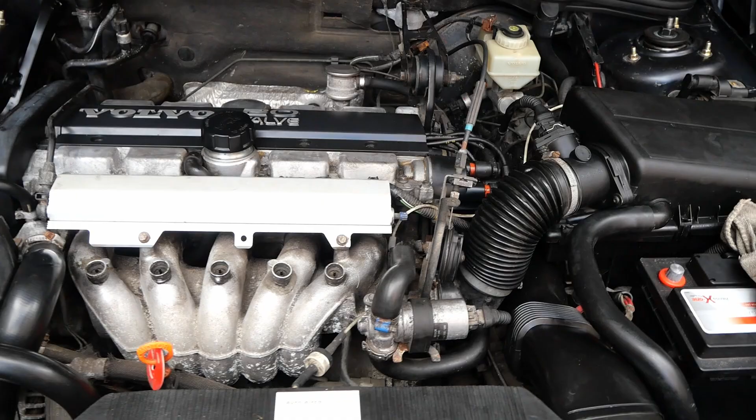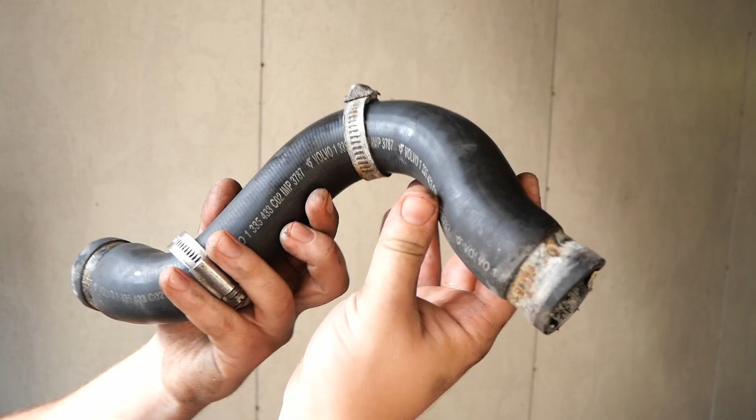Today we'll be preparing the engine to finally replace our old timing belt, as that is over 9 years old. Seeing as there are quite a few parts which need to be replaced anyway, we decided to remove the coolant reservoir because it's in a pretty bad shape, the steering pump as that makes an awful noise, the alternator because it's pretty much dead, and the serpentine belt, some coolant hoses and the thermostat. Now let's dig right... oh wait, we found yet another little surprise, so stick around and find out.

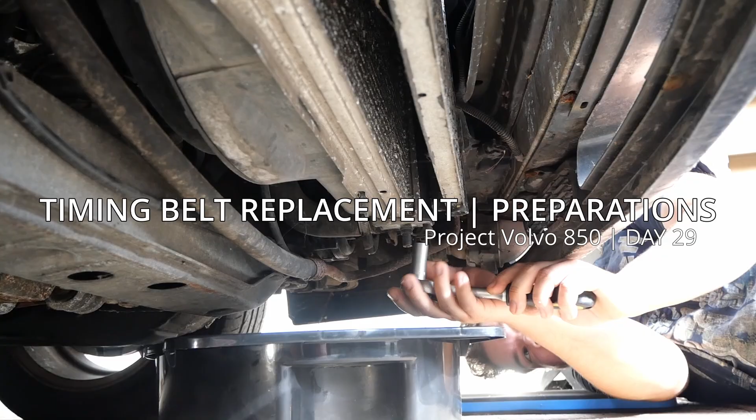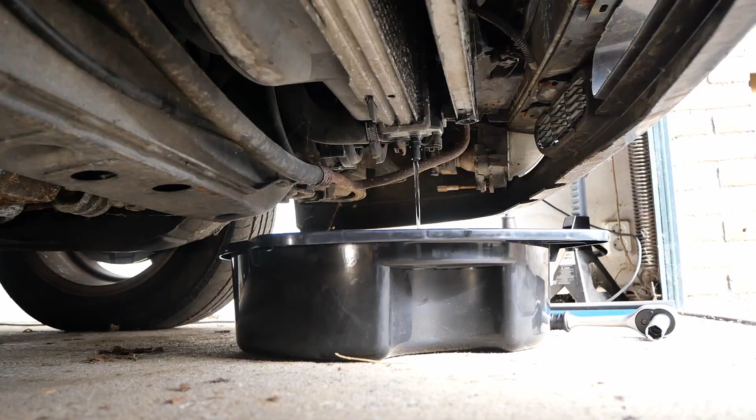Oh, it's loose. Alright, first things first, we need to drain the coolant system before we can remove the reservoir and some of the hoses. Looks like water. Well, if it has been water for 7, 9 years by now, then that flush will probably be a good idea. Now with the coolant drained, let's remove the reservoir and some of the hoses.

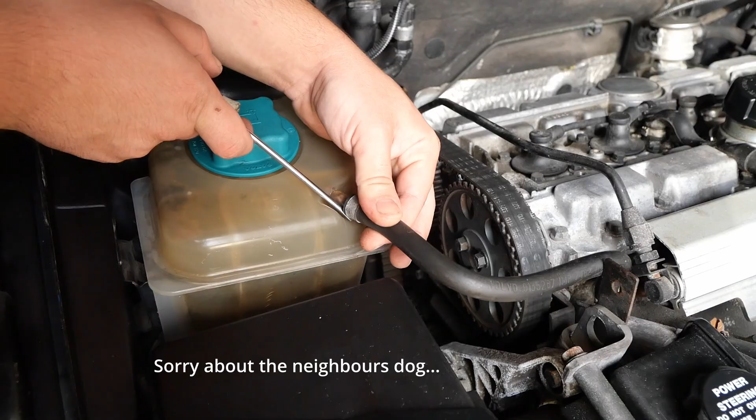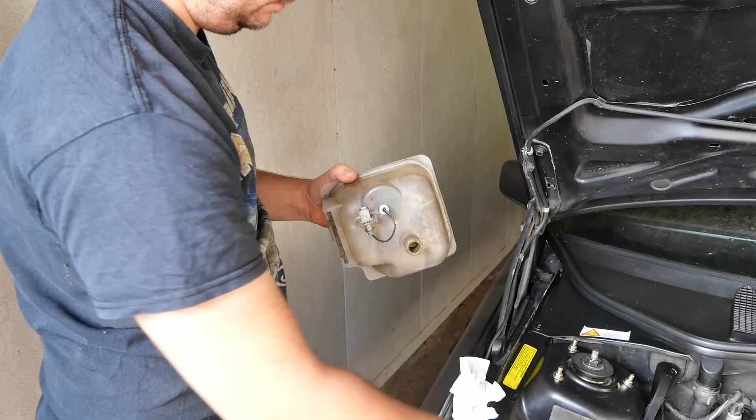Yeah, that's something we're gonna have to replace. Good way to start the day, right? Well, if we're gonna replace that, we might as well replace the coolant level sensor. Okay, that's out.

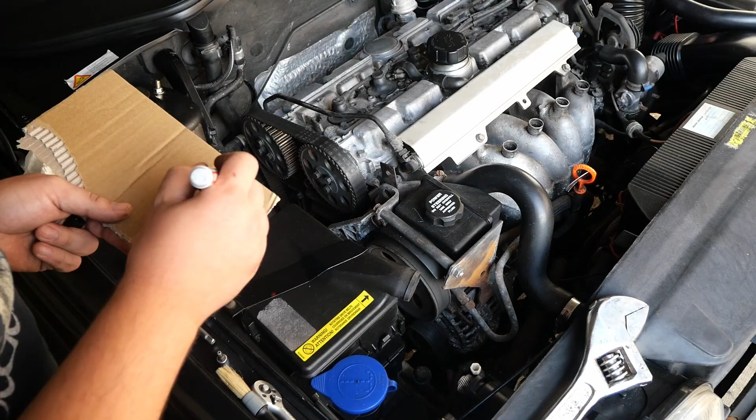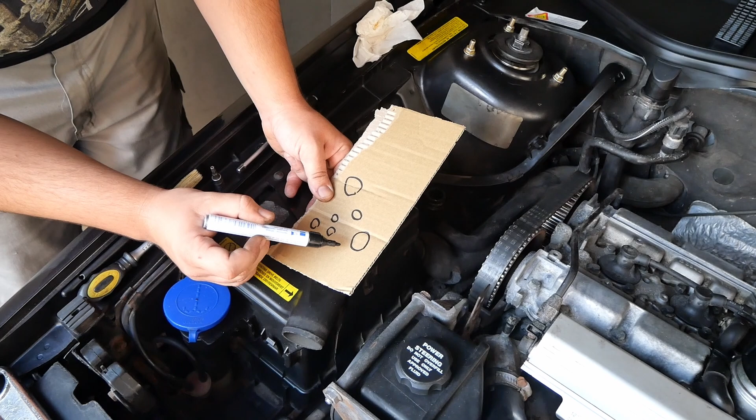Next up, we decided to remove the serpentine belt. Make a drawing: steering pump, tensioner, crankshaft, airco pump, alternator, walk roll. So then it goes from the pump to the walking roll, to the alternator, to the airco pump, crankshaft, tensioner, and around the pump.

In order to release the tension on the serpentine belt, you need a special tool from Volvo. Or make the special tool yourself and just call it that. Now take off the serpentine belt with the special tool inside that tensioner. Then you can give it some slack and then it should come right off.

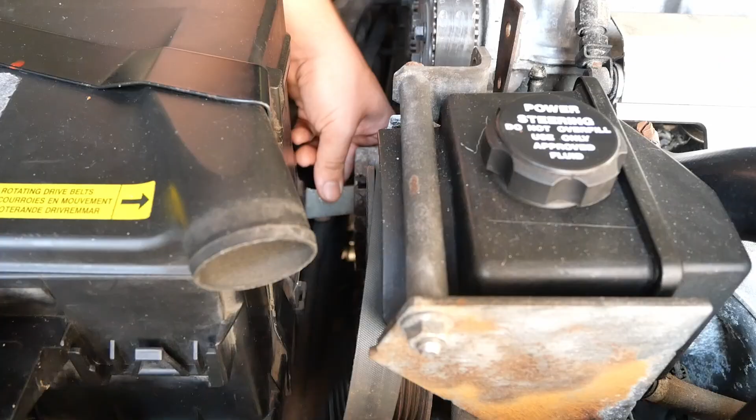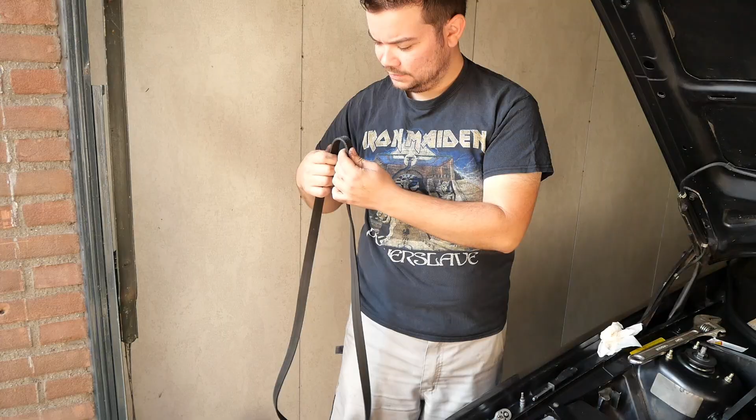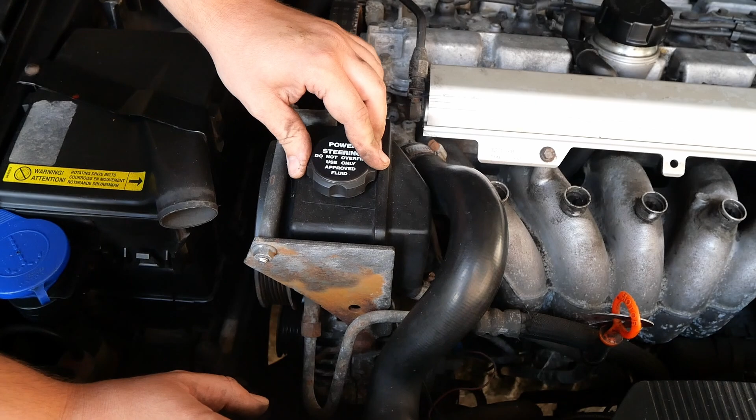Crusty. Yeah, that needed to be replaced. With that out of the way, we turn our attention to the steering pump. First thing to do is to suck out the old fluid from the reservoir, and then remove the return and high pressure hoses from the pump, and lastly remove some nuts and bolts on and from the brackets and the pump itself. If there's anything in there, yeah.

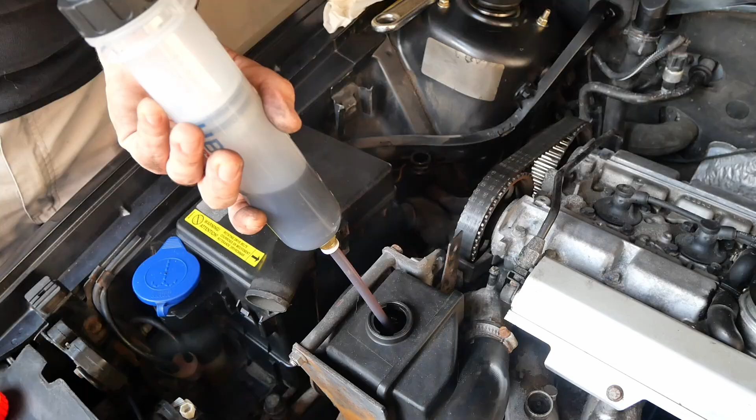Yeah, a lot of darkness. Ooh, pretty dark. Should be red. Well, it has some kind of red to it.

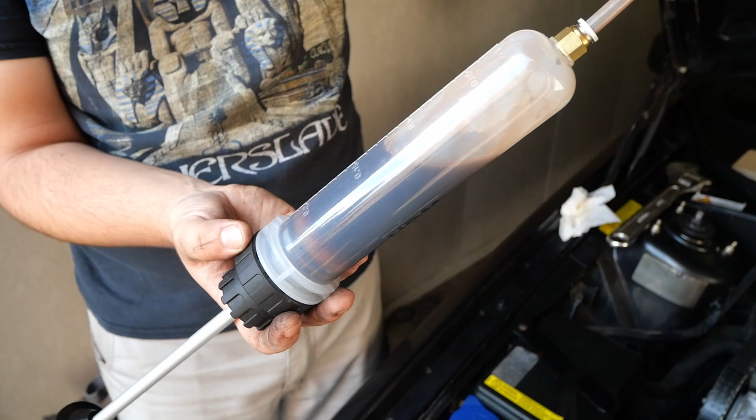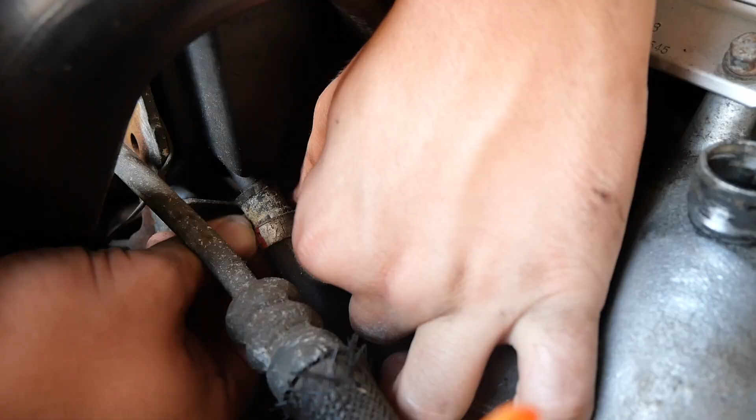Let's put a bowl under there. Wow, without spilling anything. Now get that thing out of there. Skillfully, man. Those skills, dude.

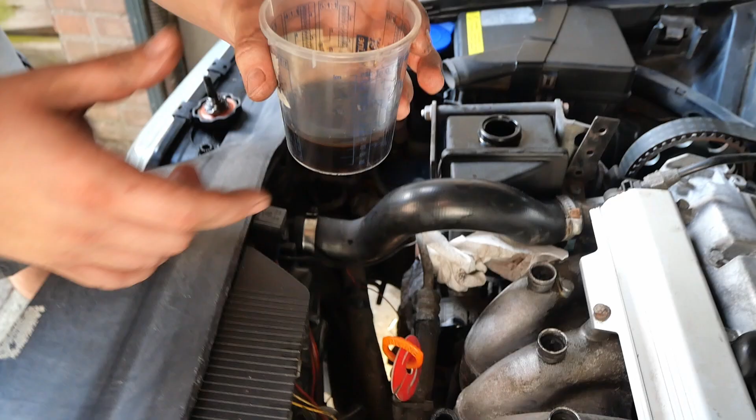So next up is the high pressure line of the steering pump assembly. That's the one we need to loosen up. So if you're just replacing the steering pump, you make sure nothing from the oil goes into the alternator.

Let's get the bowl. Well, there's no room for a bowl. So you don't want that on a new alternator. First get rid of this bracket, I guess. Yes, and we can restore this bracket also.

Hello kitty. Bye kitty. What?

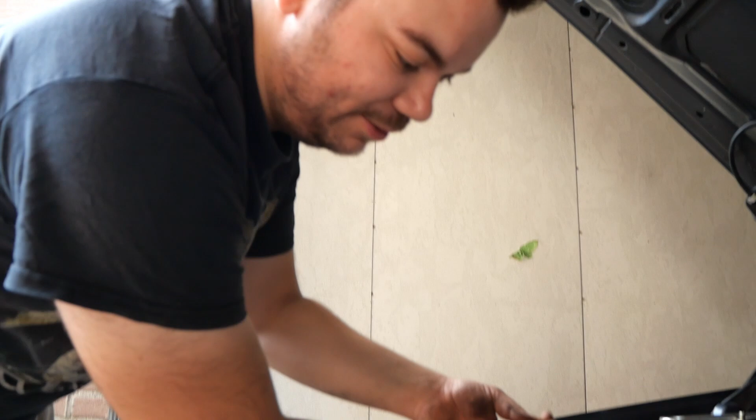So we'll take this coolant hose off for better access, because the coolant is already drained. It has to come off anyway, because the thermostat is hidden behind there somewhere.

Everything is getting dirty. They keep me mowing the front lawn.

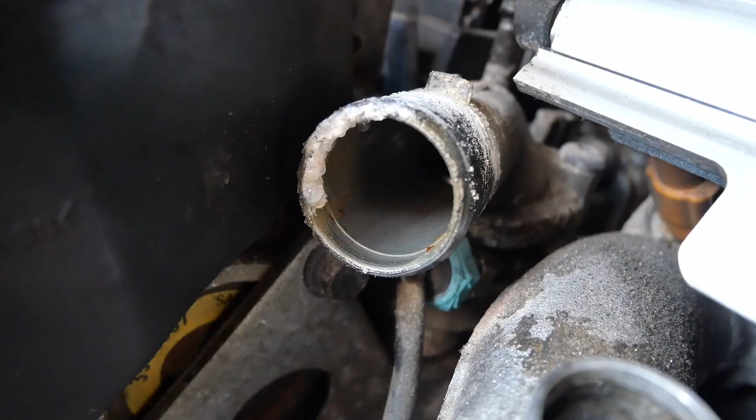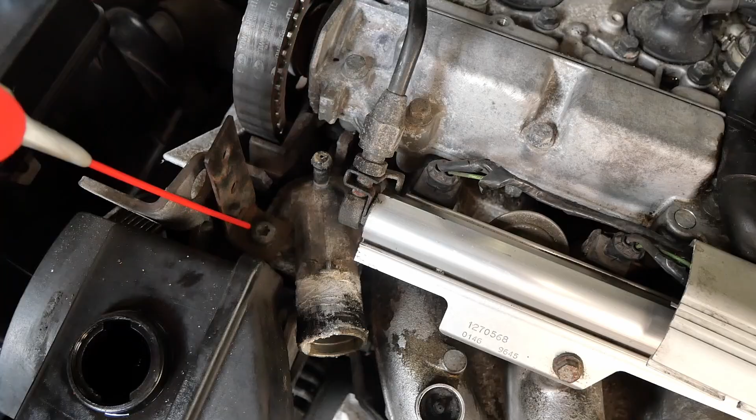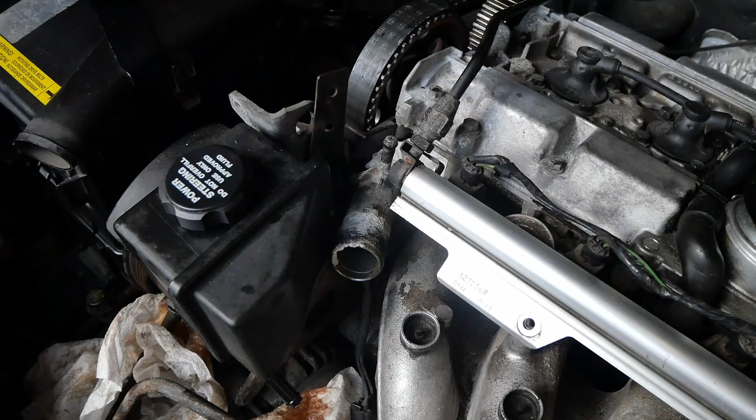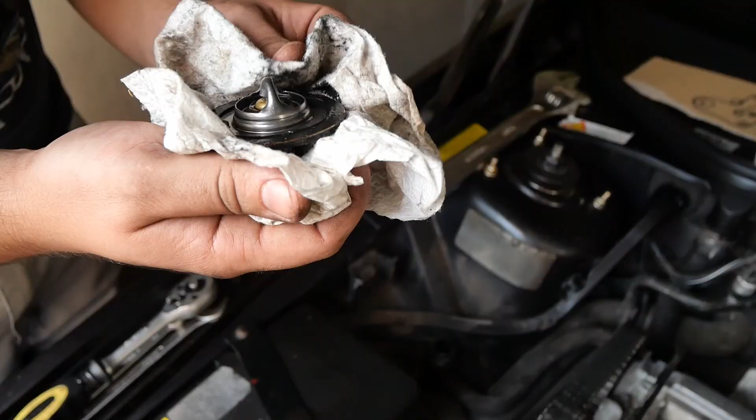It's maybe a good idea to get some new bolts for it. Yep. Alright, the other bolt. There comes that thermostat housing. Right, let's take the thermostat out. The gasket, solid as a rock.

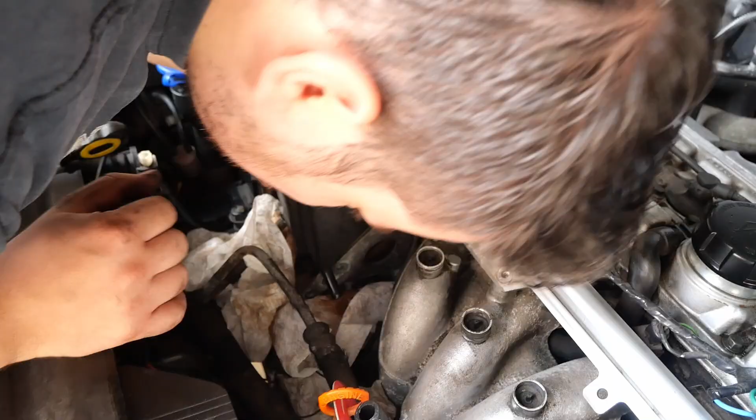Yep, so there's one remaining bolt for the steering pump. Right, that's that bolt out. Now, that should come out. Are we missing another one? Yep. It does align. Would be nice if we removed all the bolts. There it is. Yeah, that was the last one.

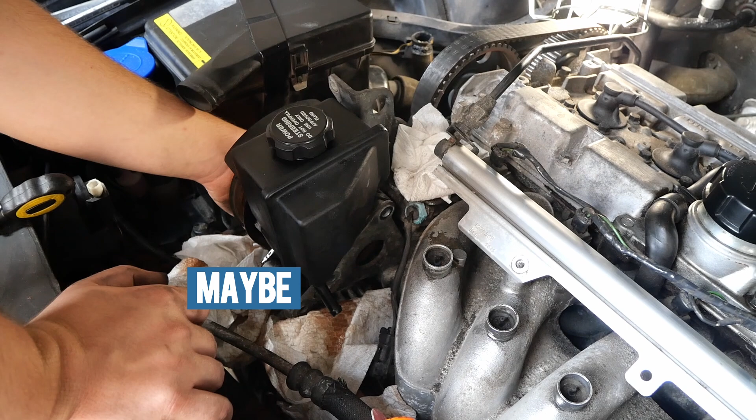Maybe we should check Haynes more often. But it's fun to figure out ourselves. At least I find that fun. I'm gonna have to agree with that.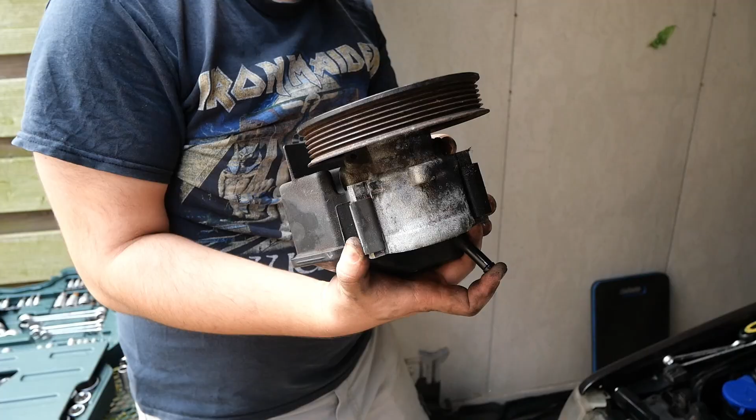Right, now it should come free. Yes, that's it. So that's something we're gonna replace entirely. Right, next up, we need to remove that tensioner. We just saw that it's a lovely condition that it's in. Yeah. So let's get rid of that. Now, the next thing we need to remove are some more brackets and the alternator.

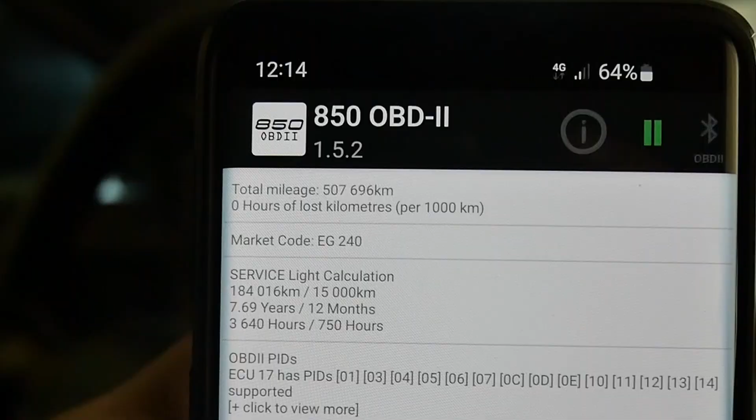But before that, one of our viewers, who by the way drives a lovely V70R Classic, tracked us down and really wanted to come by and take a look at our project up close. After having some great conversations about our 850 project and his V70R, Pete mentioned he brought his OBD2 reader, and that was an opportunity we couldn't pass by. So after letting the OBD do its thing, we found out that we have almost exactly 100,000 kilometers more on the clock. This could mean one of two things.

The odometer gear was or is broken, although there is no mention of this in any of the documentation we have, or the odometer has been rolled back. Now, seeing as it's almost exactly 100,000 kilometers, it's suspicious to say the least. Whichever it is, of course, we'll have to fix that. So Pete, thanks for helping us out and sharing a great deal of knowledge. Now, let's remove some more brackets and the alternator.

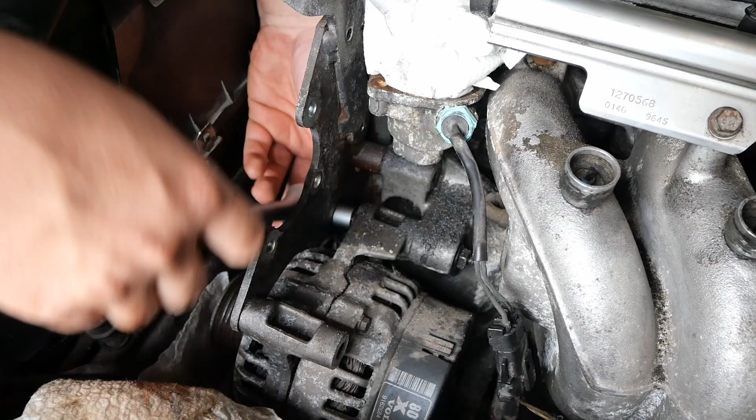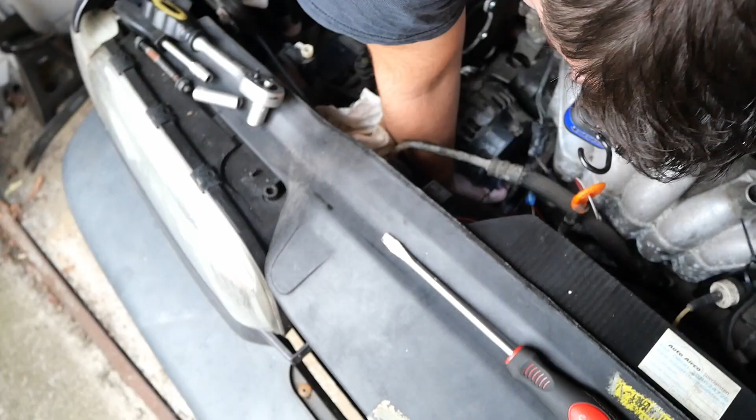We couldn't find one of the bolts on the alternator, so we moved the idler pulley first to see if it's hidden behind that. Alright. Hey, I see thread. Maybe it's from the other side. Yeah. There it is. Oh, that's loose. Right, that's out.

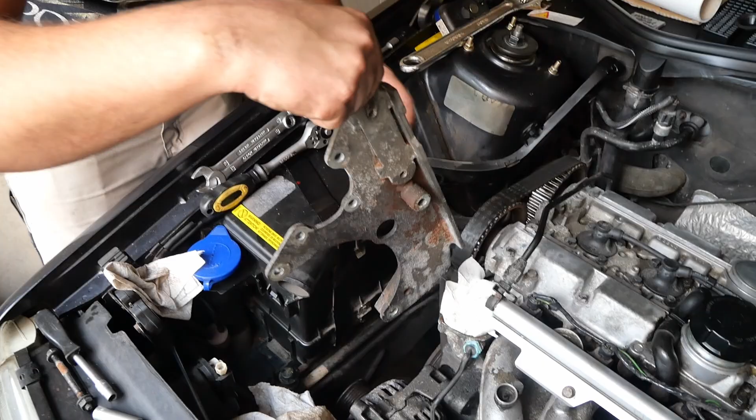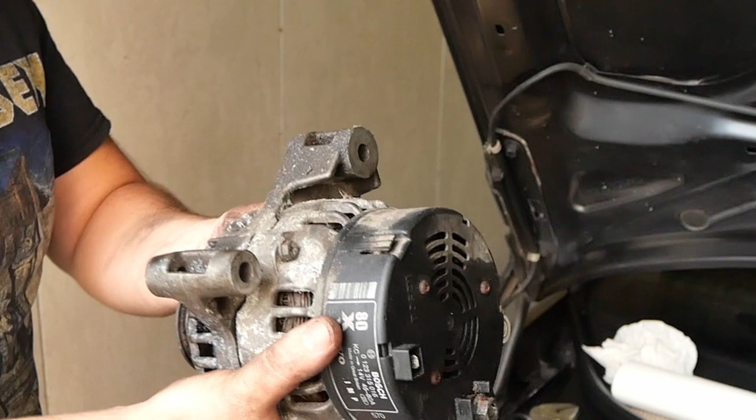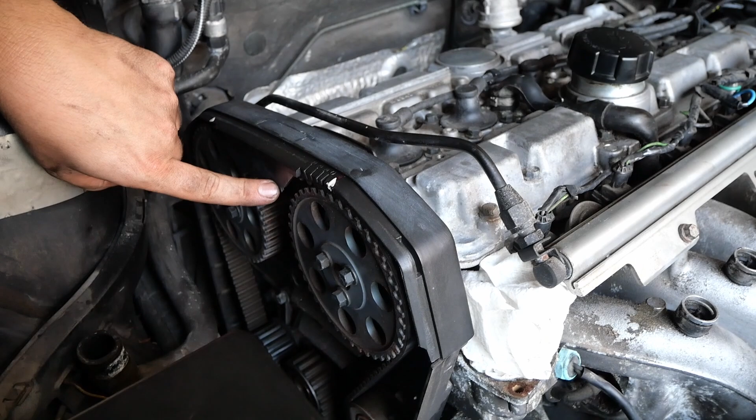Well, I want that out. Oh yeah. Got him. It's a boy. I think it's dead. Probably. So in order to maintain the right timing, you need to put back that plastic cover. And then we gotta lift up the car so we can turn the engine freely and then line it up.

Solid as a rock. And now, it's a matter of turning the engine and lining that up. That seems to match up. That line should match up with that notch, yeah. And the same goes for that line. Needs to match up with that notch.

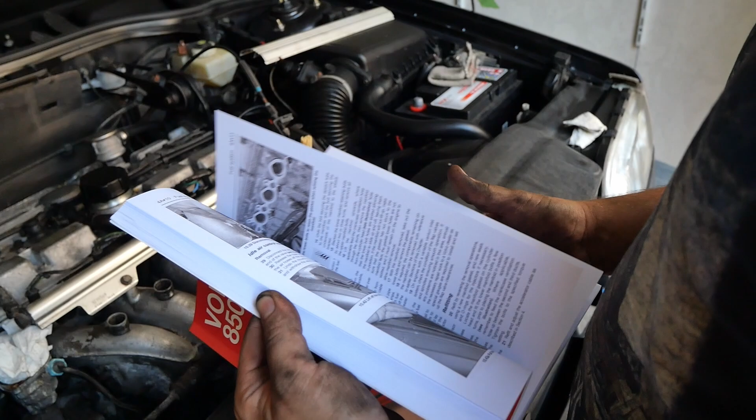And then they already did something here. They marked that and the white part over there, so that's the same over here. They also marked that when they replaced it in the past, so that's good to know. Yep, that's all lined up. Good. See the crankshaft pulley. So there. Let's see if we lined up everything correctly.

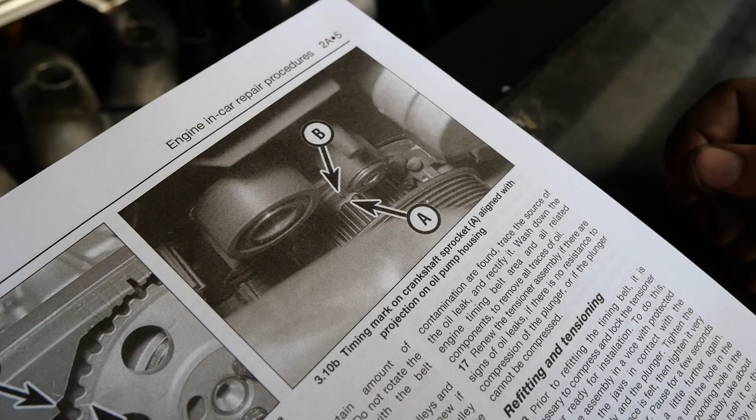Engine. Well, that's a coincidence. So, I mean, that's lined up. That's lined up. You got that right. Then there's that marker. Yeah, that's what we were trying to show. That's very hard to see. Yeah. Just need to remove that timing belt guard plate on the bottom. Yeah.

Right. Alright, so we only got an hour left. So we're gonna leave the timing belt for now. We don't want anything rotating without the belt on it. So we're gonna do some cleaning on the brackets that hold the steering pump and alternator in place. And maybe giving a little paint to that big metal part, and then, yeah, let's do that first.

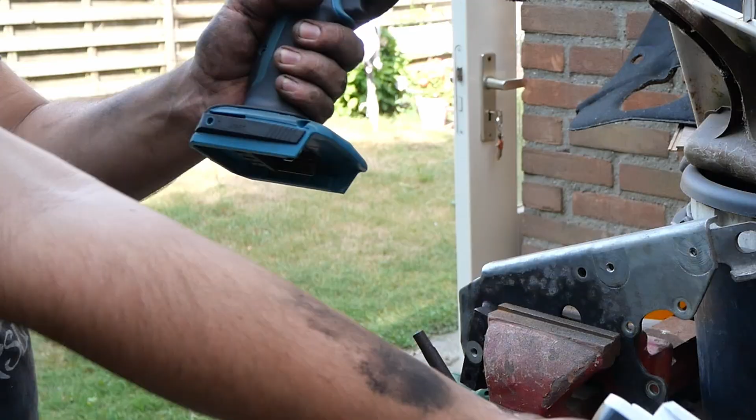Right, so that's looking a lot better. The thermostat housing is a little cleaner. And we put some rust converter on the metal bracket so we can paint that the next time. Alright, and we prepped the engine so we can replace the timing belt, and that is all we could do today.